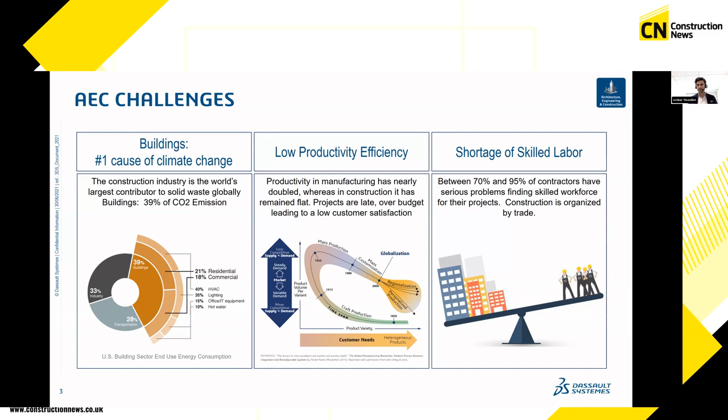To answer those challenges, we have built a dedicated portfolio of solutions from design to renovation with an integrated built environment: how to settle the global collaboration regarding all the stakeholders, ensuring the single source of truth at each moment of your project. And as well, we are working on something that is disruptive for us that Kurt will explain, and this is productization. Let me give you two elements to start.

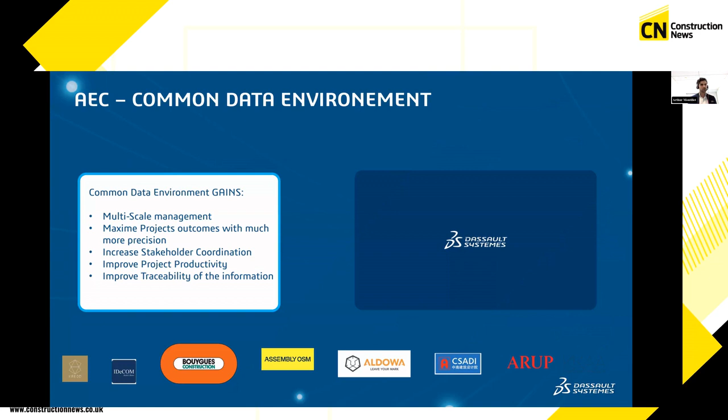The common data environment. When we are speaking about a digital twin, it's not only a 3D model, it's as well all the processes that are going to be put in place in order to conceive the 3D model. So the common data environment gains that you will be able to see with Pedro is a multi-scale management. Maximize the project outcome with much more precision, increase stakeholder coordination, improve productivity, and improve traceability of the information. The idea here is to do this approach at two levels, the enterprise level and the project level.

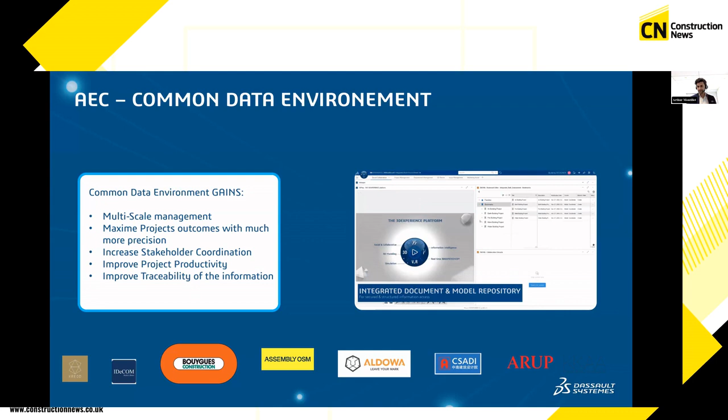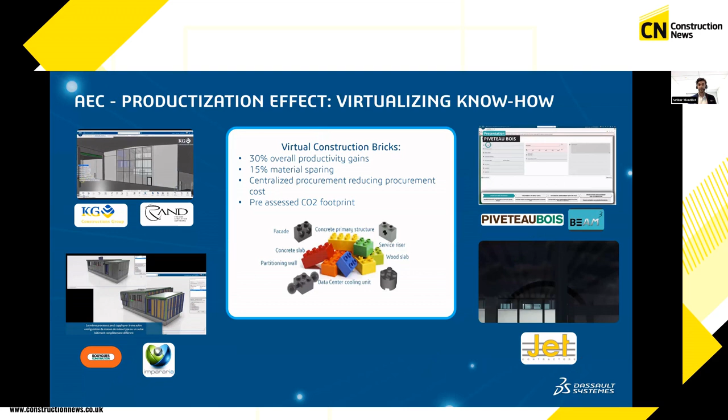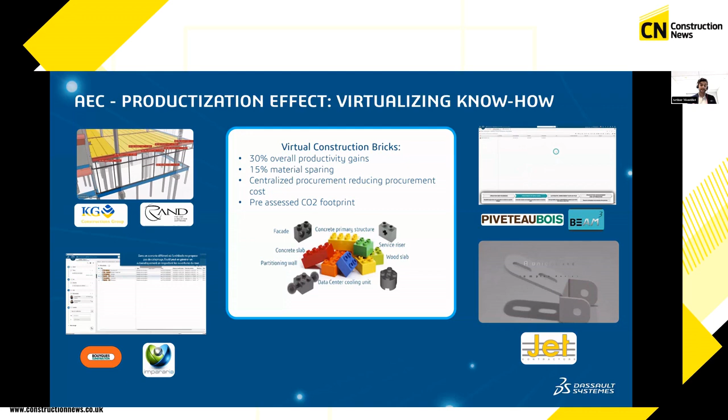Second, if we move to productization, what is productization? It's only the virtualization of the knowledge and the know-how. Here you can see some videos of several of our customers from KG Construction, Piveteau Bois in France, Jet Contractors. All those players have applied those principles that you are going to see in the Kurt session. The overall gain: 30% on the overall productivity, thanks to the virtualization of the know-how and the ability to reuse what has been done on one project in another.

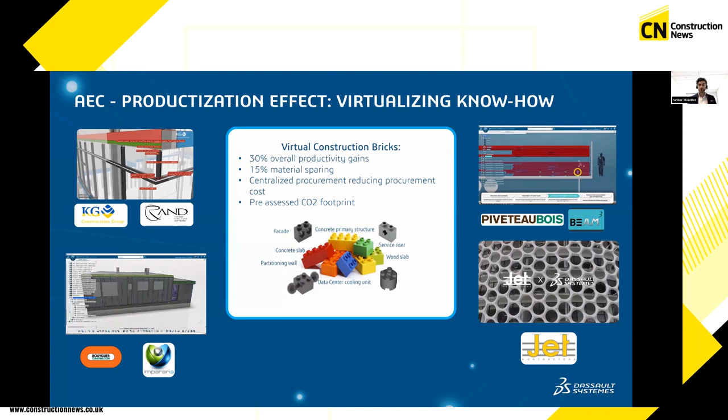15% on material sparing. Centralized procurement, reducing the procurement cost. Let's imagine that from your bill of materials, you are able to order the different screws for your buildings. You can make some good improvement regarding your purchasing process here. And of course, pre-assess the CO2 footprint. It was a quick introduction for my part.

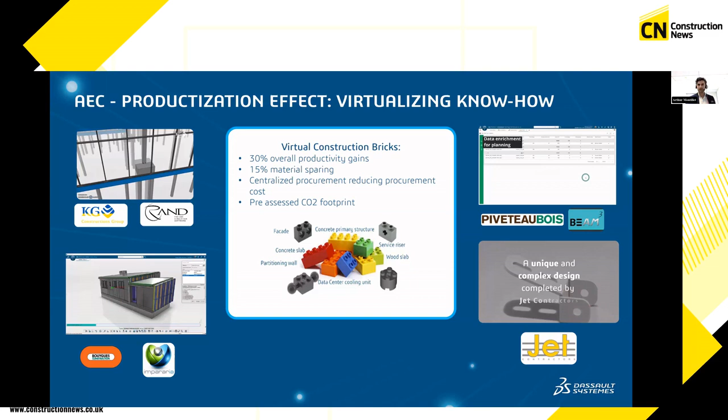My name is Pedro Diaz-Cocero, and I am Industry Solution Experience Manager with Dassault Systèmes in the Architecture, Engineering, and Construction industry team. Today I'm going to walk you through the main aspects of our common data environment, integrated data environment. According to ISO 19650, which is the most extended standard for collaboration in the AEC ecosystem, there are three main pillars that a common data environment needs to fulfill.

Without going into details, the first one is being able to manage stakeholders and the information they can access, meaning that for any piece of information, being able to determine who can see it and define these collaboration groups within the project team. The second pillar is lifecycle revision management and workflows. Basically, what the standard says is that we should be able to track the maturity of information as it evolves throughout the project, and be able to define approval workflows that allow us to validate the information before it transitions between these maturity states.

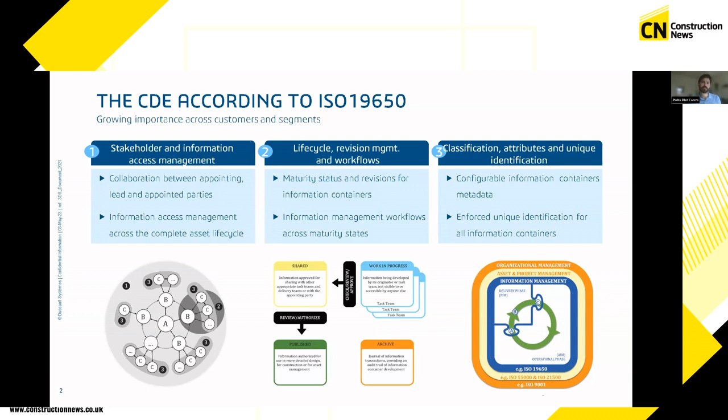The third pillar, classification, attributes, and identification, just refers to the metadata of information stored in the system. It's all about being able to capture this metadata, this additional information on all the objects, and being able to configure it, enrich it, and adapt it to the project needs. So let's have a quick look at how we fulfill these three pillars with our 3DEXPERIENCE platform.

The first pillar, stakeholder and information access management, we address with a powerful P&O, people and organization, framework, where we can create companies, business units, and departments that will group users. This allows us to segregate the information that each of these stakeholders can access. For instance, a general contractor in our platform will be able to see all the information stored in there. But if we have subcontractors that don't necessarily need to see the information provided by other subcontractors, we can make sure they are only able to see the information relevant to their company.

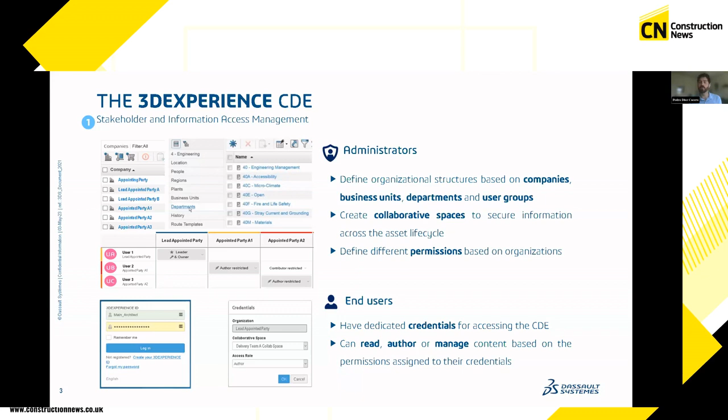All this is taken care of by the administrators, so for the end users, there's no hassle. They can just access with their individual credentials, and all the information will be filtered according to their permissions. The second pillar of the common data environment, lifecycle revision management and workflows, is part of the DNA of our system. We have a powerful lifecycle management system embedded in our solution, where every piece of information stored in our system, be it documents, drawings, BIM models, you name it, has an associated maturity.

So this piece of information will transition across these maturity states, and depending on the maturity state, it will determine who can access that information and whether it will be modifiable or not. In addition to this, we can always track the history of everything that has happened to any given object. So we can always see previous versions of the document, when those versions were created, by whom, and what were the later versions and what's the latest version.

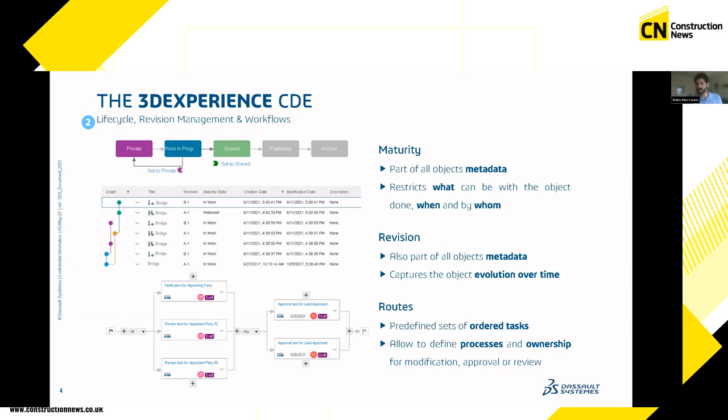And finally, with regards to the workflows, we fully support them in our system. The way it works is we can define these sets of ordered tasks and assign them to specific users or organizations, and we can at all times track in which state the workflow is, and what's the next task, and what was the feedback provided by previous users.

The third pillar of the common data environment is these metadata classification attributes, and we manage this in different ways. The first way is by being able to enrich all the metadata of a specific object type. Say that you want to add an attribute to a document or to a drawing or to a site or a BIM. We can do that.

But we can also leverage classification. And the way this works is by defining these hierarchical structures where by adding a specific information to a container, it will automatically inherit attributes that are relevant for that part. And that way you can enrich documents, drawings, or BIM models, anything in a very smooth way.

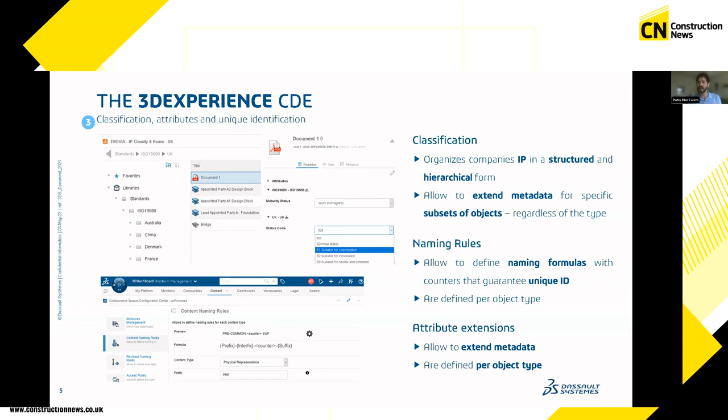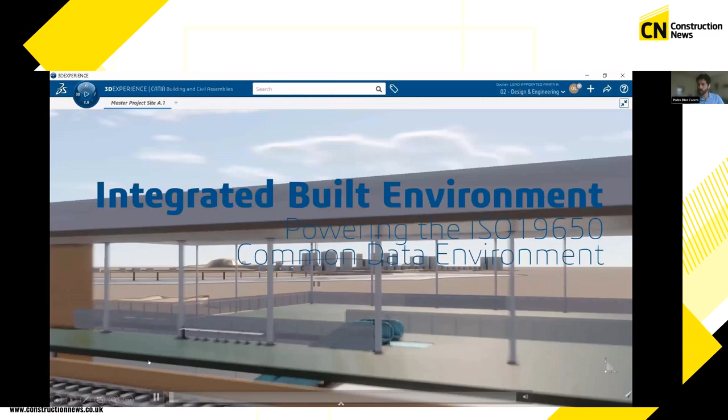Now let's have a look at this video that explains everything that I just covered quickly and illustrates a bit better how we address that with 3D Experience. So as I was introducing for the first pillar, the stakeholder and information access management, we manage that with specific credentials. So if a general contractor accesses the platform, they will be able to see all the project information. But if a subcontractor accesses the same environment, the same dashboard, the information will be filtered automatically just to show the information that is relevant to them.

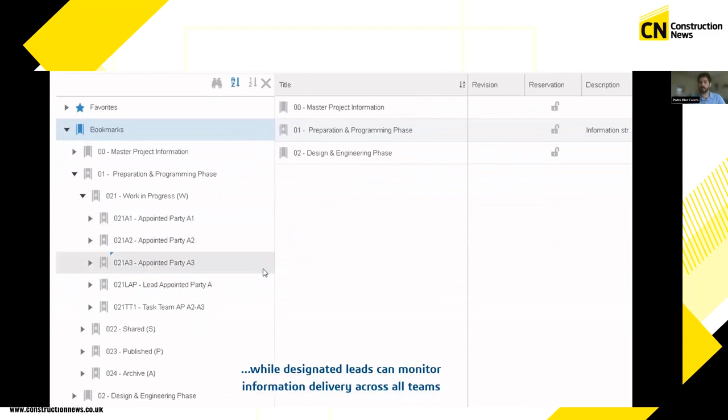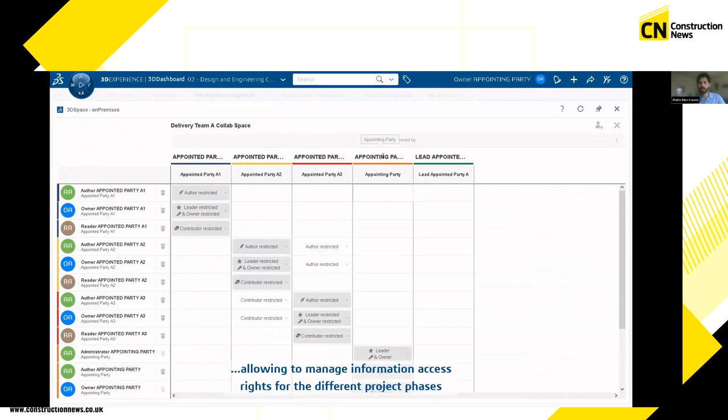Of course, same goes for all other types of information. So if we're looking at documents, if you're looking at bookmark structures, the information is automatically filtered to display only the information that is relevant to them. How we achieve that is through this structure of companies, business units, and departments that allow us to organize the people that are accessing the environment and with what permissions. In this way, we can define for any user accessing the environment what kind of permissions they will have and with whom they will be able to collaborate.

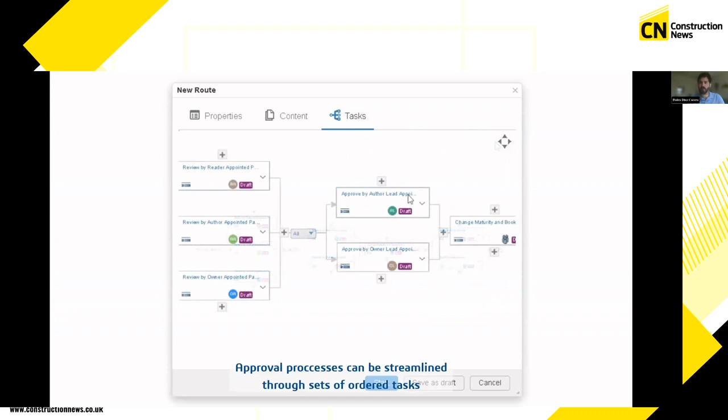On the second pillar, lifecycle revision management and workflows, this is the concept of routes that I was introducing, how we can have these sets of ordered tasks where different users will be able to provide feedback on any specific piece of information. And we will be able to track the feedback provided by all the different users and revisit what has been given as feedback in previous steps and take that into consideration for the evaluation of any information.

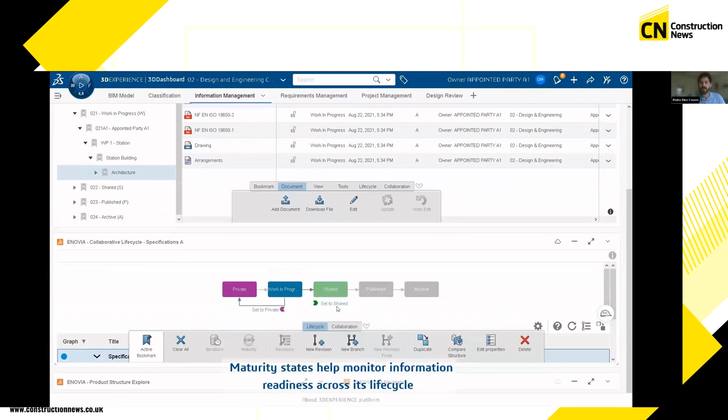The last bit, the maturity states, as I was mentioning, any information in the system will be able to transition across these maturity states. And depending on the permissions of the user, they will be allowed or not to modify the information. We can always track the versions of all the information and be able to revert to those previous stages and see who performed these changes and at what stage.

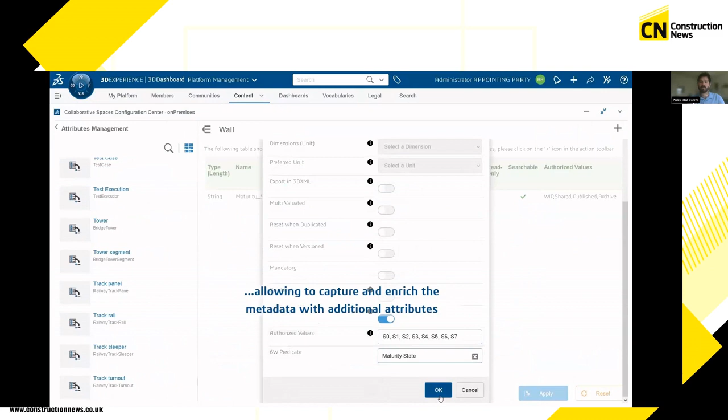Finally, regarding the metadata, we have a powerful data model behind our system that can be enriched by adding all these additional attributes to enrich the metadata of objects with predefined values of all different types. In addition to this, we for sure fulfill the naming rules that are required for your project so that we can adapt them to meet project needs. All these will be taken into account when generating new information and will be available for all the users automatically accessing the system.

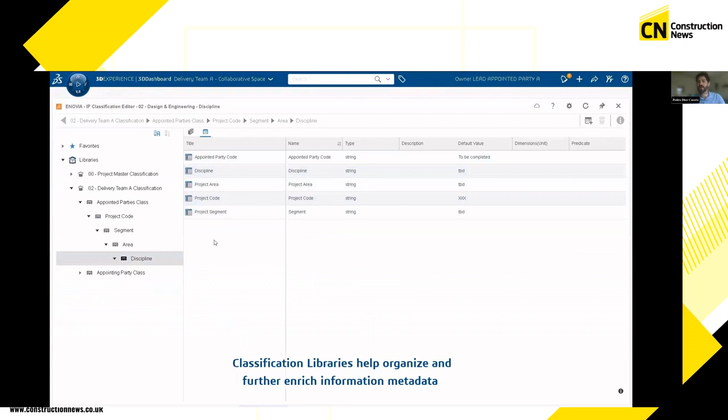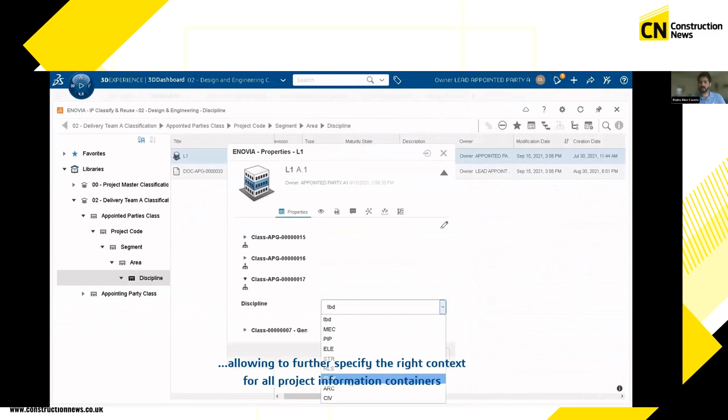Finally, on the classification, as I was introducing before, we have these hierarchical structures where by adding objects to these containers, they will automatically inherit attributes, being able to define what are the predefined values they should have and providing specific lists so that we can control the metadata of all these objects.

Very quickly, just to emphasize two key aspects of our common data environment and why we are different with 3D Experience. While other systems can perform most of the things that I was mentioning before, they still don't guarantee that there's no duplicates of information, and they still rely on these manual exchanges with no context and unstructured data. So what they have is documents that are stored in files. What we provide is an information management system where documents are objects like projects, the virtual twin of your asset, tasks, issues, everything is a dedicated object.

And what we provide is the possibility for the same document to be connected to the project where it will become a deliverable, to the virtual twin where it enriches the additional information on top of the BIM attributes and the 3D model of your twin, and it can be connected to a bookmark structure to package it in a form of a work package that can be assigned to a specific subcontractor. So documents we can manage, but in context of all this richer information, providing much better traceability and the possibility to guarantee a single source of information for all stakeholders.

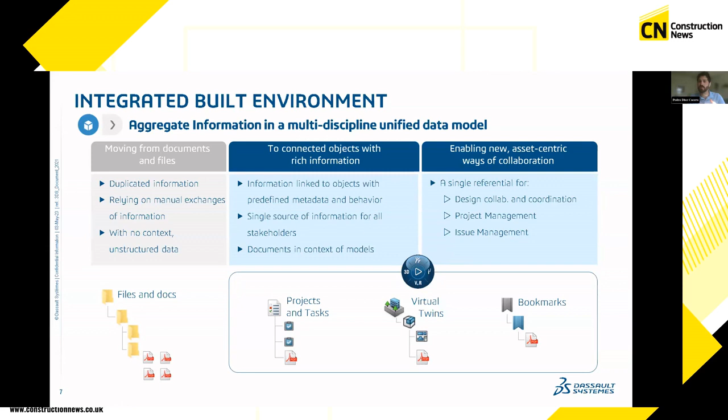The second key aspect of our common data environment, integrated built environment, is the way we manage collaboration in projects. So in traditional ecosystems, we have this scattered, disconnected ecosystem where each stakeholder is using their own common data environment or their own information management system, and they will manage exchanges through files and basically distributing the risk. And what we have here is mostly paper-based exchanges, 2D file-based with no information flow.

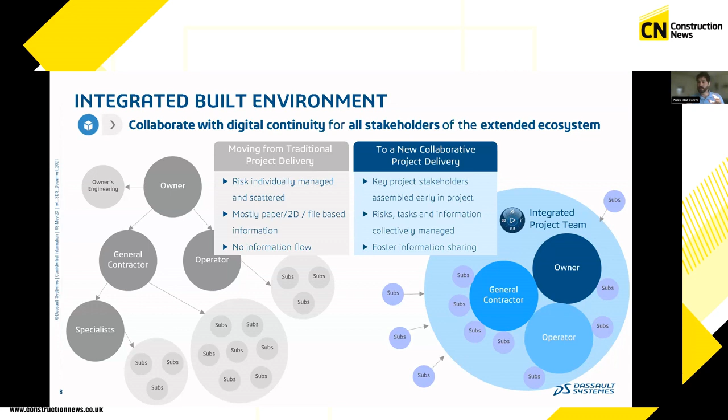What we provide is a single ecosystem, a single common data environment for all stakeholders where they can connect, always review the latest version of the truth with risks and tasks and information collectively managed and assigned to specific users, guaranteeing traceability. In addition to what I presented, there are more capabilities that we can bring. For sure, multi-scale common data environments is one of the aspects where we can connect BIM plus GIS information.

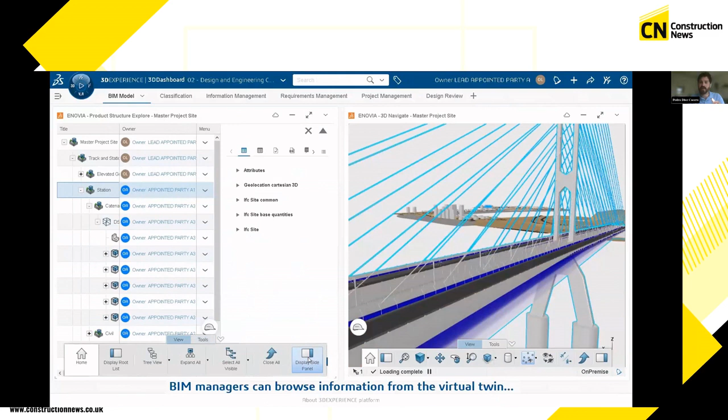There's a lot more. What we provide is a unified virtual twin where all information, regardless of metadata, related documents, issues, is connected to the virtual twin of the asset. So all information can be revealed for all the stakeholders that have access to it. And what we have is an intelligent model that can be filtered and queried based on all these metadata, all these attributes, to find the information that is relevant for all users.

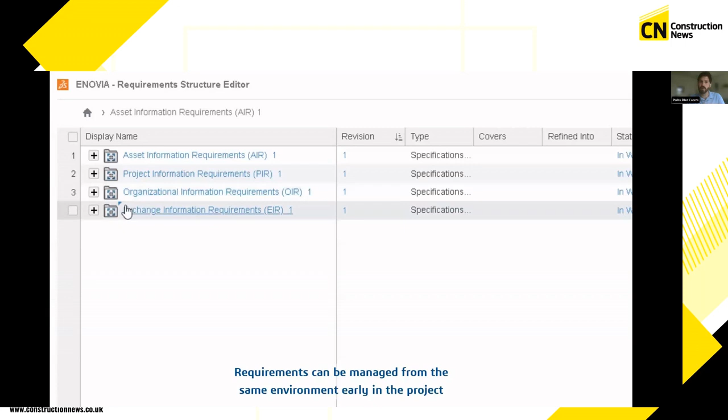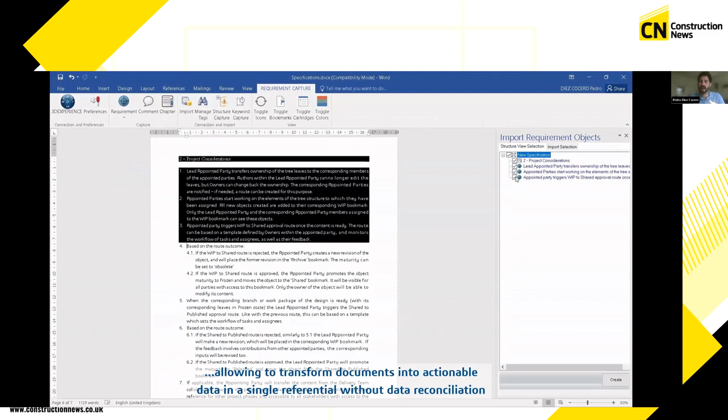In addition to this, we provide the capability to manage requirements that are related to the project so that at any given time, we can track the information that is required at any given stage of the project. We can convert it into actionable objects that can be assigned to users to guarantee delivery throughout the project. In addition to the requirements management solutions, we provide a full BIM review process where models can be brought into the platform in various ways through standards or through proprietary formats, and we can validate the information provided against predefined rules, so we can check if the models fulfill the requirements of the project.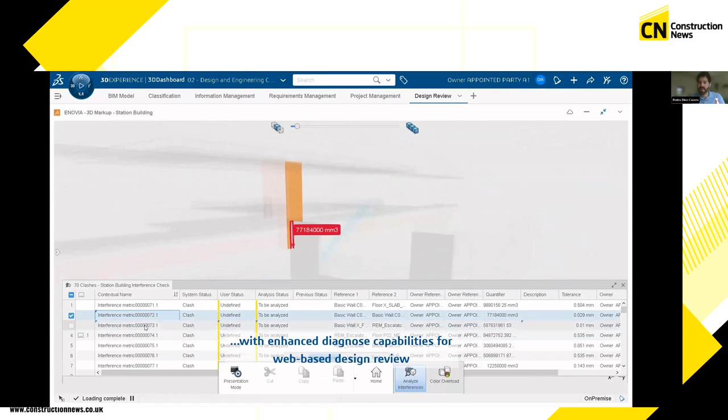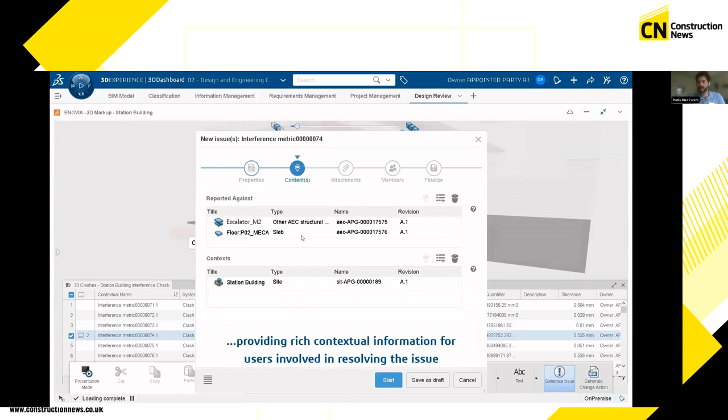We can run clash analyses to determine whether there are any issues among the models that are provided by the different subcontractors. We can analyze them in depth, and we can automatically trigger validation workflows and issue resolution workflows, leveraging the virtual twin of the asset to provide contextual information. These validation workflows for the issues track all the information that is relevant for the resolution, provide rich context in terms of the parts of the asset that are impacted by the issue, and can be assigned to specific stakeholders for managing the resolution.

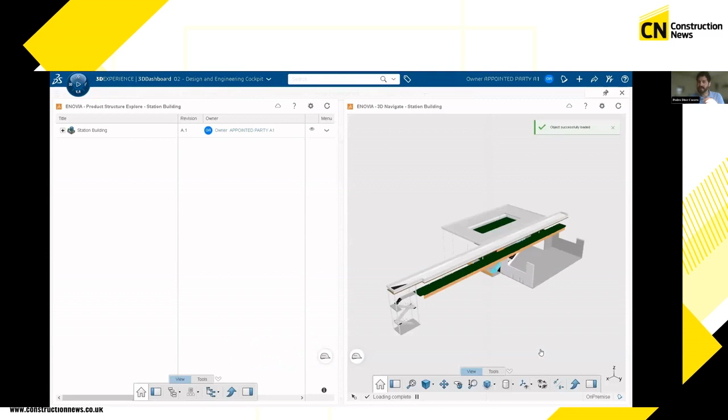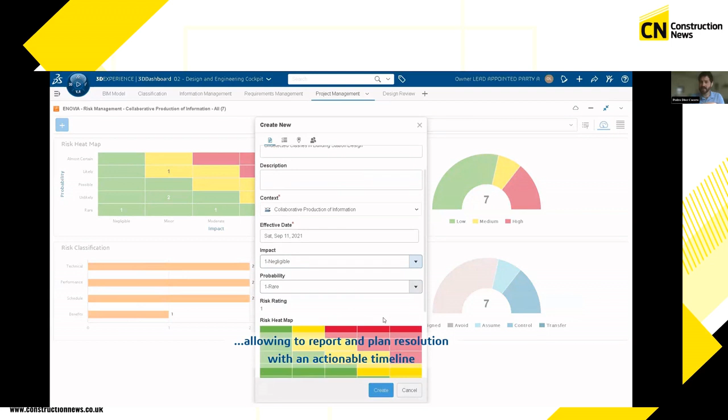All the information, again, becomes available through the virtual twin of the asset, which is the centralized place of managing all this information. In addition to the issue management capabilities, we have a full-fledged project management solution embedded in our system, where tasks and risks are connected to the virtual twin. In this way, we can manage holistically all the risks that are related to the project, and we can define who is responsible for mitigating the risks, what will be the mitigation strategy. We can assign specific gates for the resolution, guaranteeing a smooth resolution and tracking of the risks of the project. All these, again, connected to the virtual twin, providing a rich context for all the information that is available in the system.

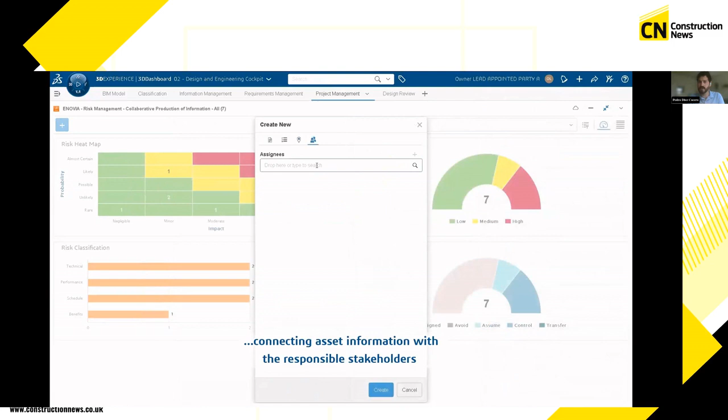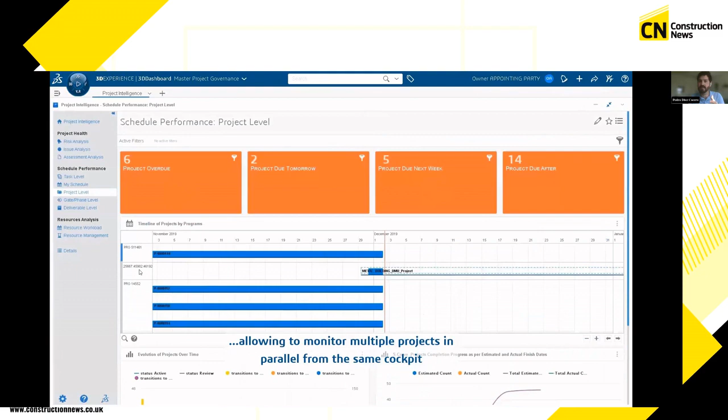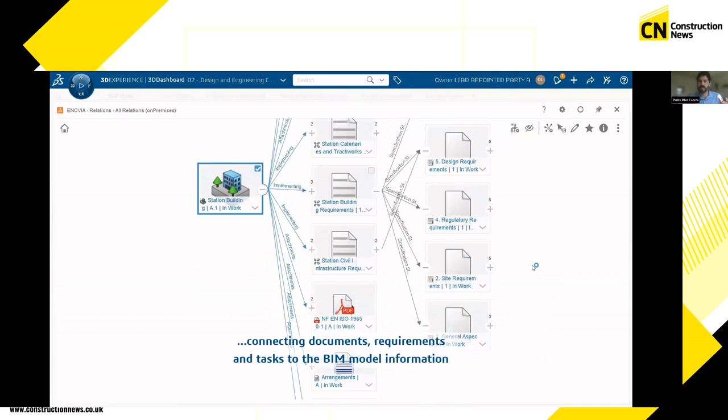Finally, we have analytics tools that allow us to have a holistic view of multiple projects that are being run in our system, being able to define all the tasks that are late, all the documents that are due, where the bottlenecks are. And in the end, what we provide is this full traceability, leveraging the virtual twin as the placeholder of all the risks, tasks, requirements, documents, drawings, everything, providing this holistic, unified, common data environment for all the stakeholders.

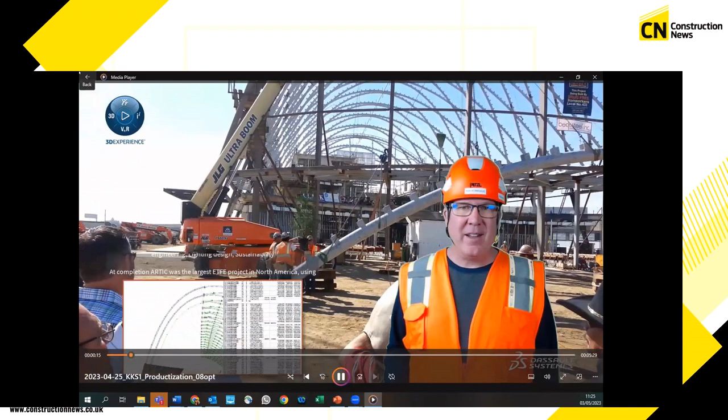Hello, my name is Kurt Komros. I am the Industry Solution Experience Senior Manager for the Architecture, Engineering, and Construction industry here at Dassault Systemes. I have over 20 years experience in the AEC industry, from architectural design to digital process development to automated structural and facade engineering to construction administration. You know, stuff like this.

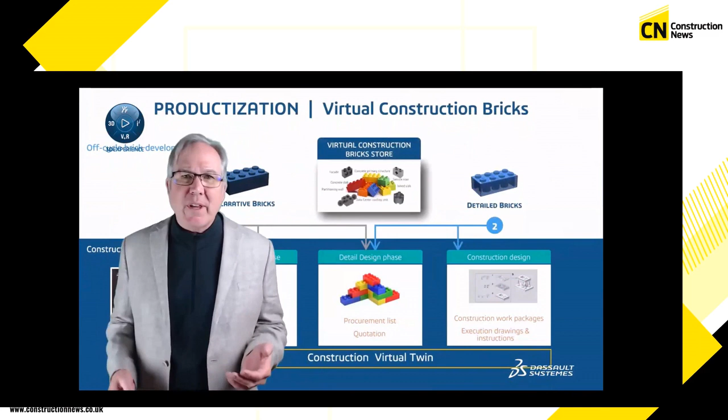Anyway, I'm here to talk about productization. So what is this productization that I speak of? And how can you get some? So, productization is a different approach that unlocks new levels of value and scalability for contractors and developers. At the core of this strategy are virtual construction bricks, digital templates which encapsulate construction know-how in multi-trade assemblies with standardized interfaces and generative variants.

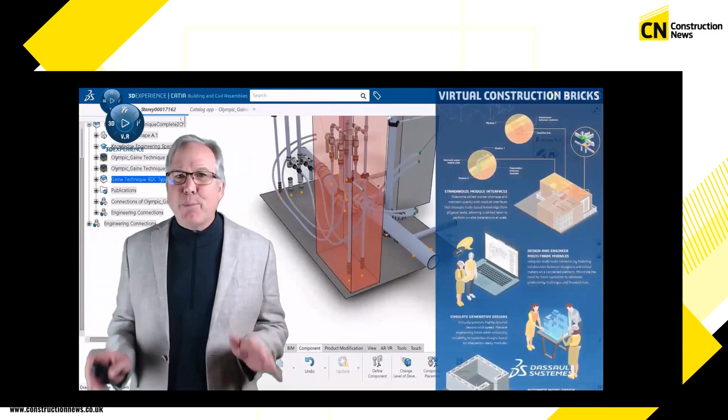These bricks are modules that we organize into product lines, which can achieve a wide range of objectives of stakeholders, such as owners and general contractors. The primary concept, however, is that these bricks are managed independently of projects, an upstream investment in downstream construction serenity. Basically, what this means is treating building design like consumer product design.

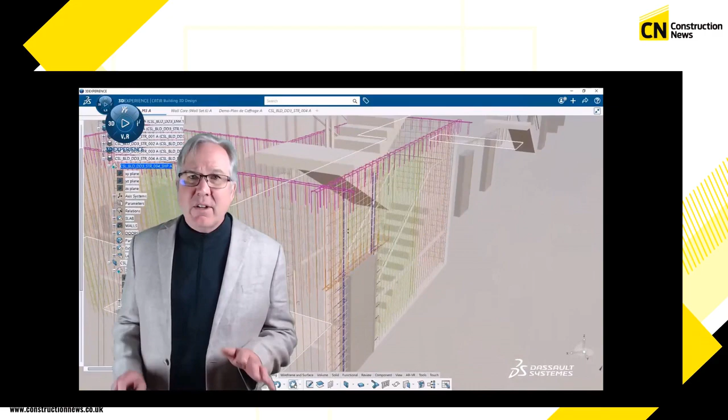We do this upstream from the turmoil of a normal architectural design cycle, meaning we design, engineer, simulate, document, and validate multi-trade elements or systems that can be templated to be efficiently incorporated into a variety of building contexts in a contractor's pipeline. One of the key benefits of productization is sustainability. True innovation in carbon reduction requires thoughtful study and engineering outside of the project delivery cycle.

Now, very important to the concept of productization is modularity. And this can, but does not have to be volumetric modular, but modularity as in modular product design, meaning custom components with standard interfaces that can be incorporated into the bigger assembly, interchangeably and produced by an organized supply chain.

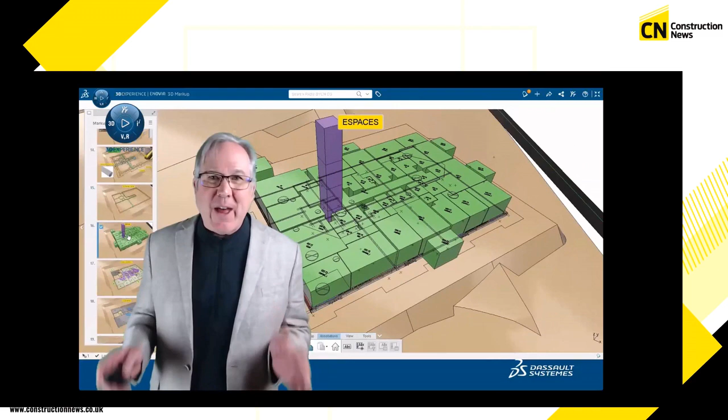Next, these virtual construction bricks are produced by you, the experts in construction. You become virtual makers, adding your value in the development of true virtual construction twins, which are hosted by the prime integrator. So, imagine being able to detail a building enclosure design for 200,000 square feet of curtain wall in just 10 clicks, or have the ability to move 10,000 structural embeds in minutes, because the slab edge detail changed again. There are no limits to the amount of construction know-how that we can bundle.

Now, it does take time, a cultural shift, and requires diligent refinement to develop these bricks such that they can be used across many projects. And ultimately, the global construction ecosystem will have a proper digital marketplace where virtual makers can efficiently connect with prime integrators and other stakeholders for an accelerated construction twin.

Okay, so how do we help with all of this? Our solution for productization is a business, design, engineering, and lifecycle management enabler called From Experience to Construction. From Experience to Construction is broken down into 5 parts, what we call industry process experiences. Number 1, building system architecture. This is model-based system engineering for product definition.

Number 2, virtual construction experience portfolio management for product data management, product development, and governance. Number 3, virtual construction experience modeling for brick authoring in CATIA or SolidWorks, or consolidate data from other sources. Number 4, virtual construction experience process engineering for process simulation and work instructions. Number 5, virtual construction project composition for integration of bricks in the virtual construction twin.

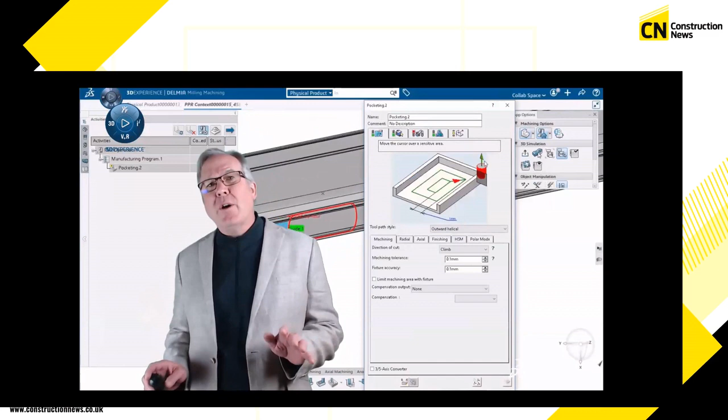So, to wrap this up, productization is powered by our vast capabilities to automate the complexities of construction design, and it is our unique ability to capture this much design intent that puts us in a whole different universe from our competitors. Our tools are no longer just for the geometrically complex projects, because all construction projects are complex, and our tools and our methods have been proven around the world to provide value far beyond the investment.

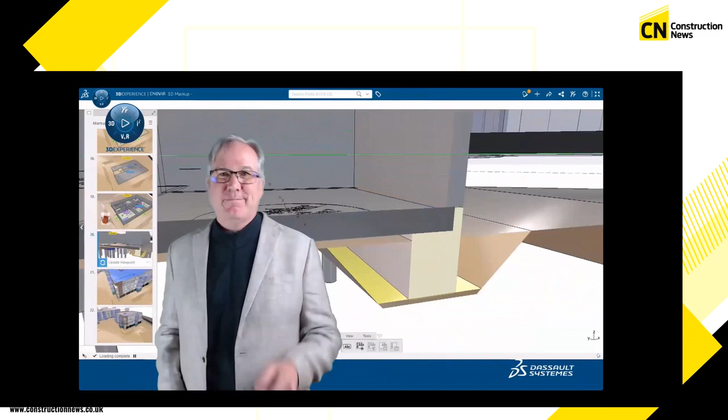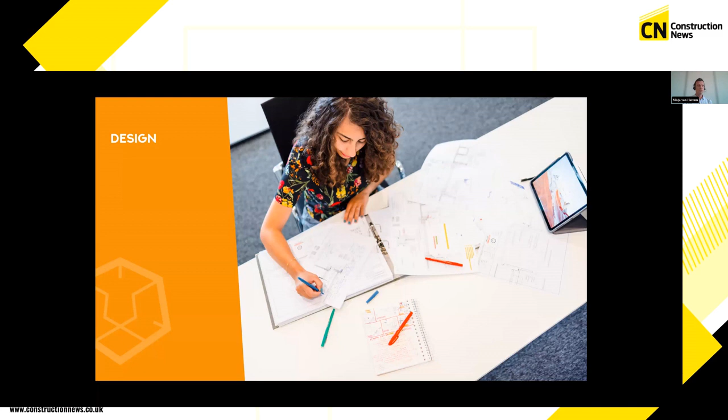So, Aldowa, who are we? We're a full service facade builder for metal and composite cladding, meaning we take on entire projects from design to engineering, manufacturing, and finally installation as well. So first design, we take the idea of the architect and try to transform that into something that can actually be built, ideally in close collaboration with all other stakeholders.

Then we take that idea and we model that, and we turn it into something that is engineered well and ready to be manufactured. We do all the manufacturing in our own factory, and after this we install everything on site, trying to tackle all challenges that we might face there.

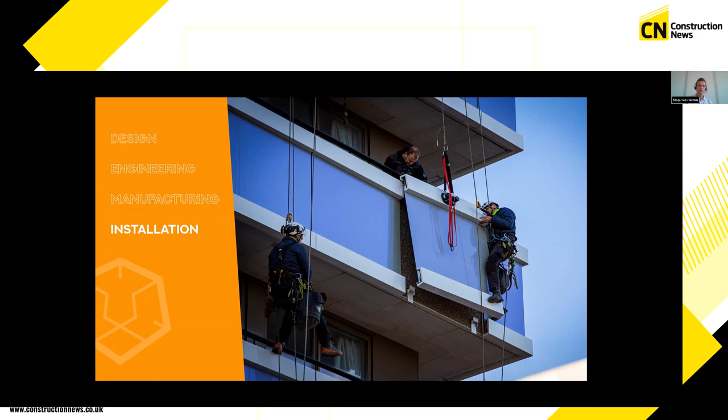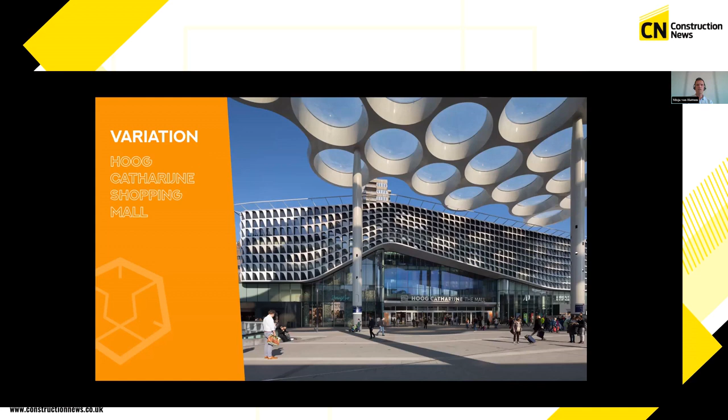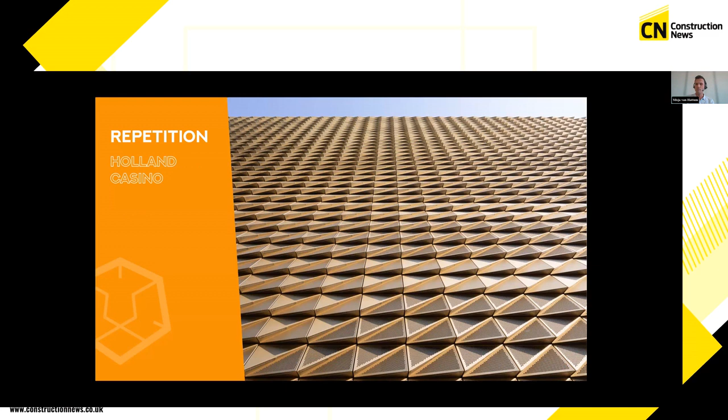So our projects. We have been using Dassault Systèmes software for a long time, and with great satisfaction. But over time, we felt we had some challenges. For example, logistics, making sure that every piece of the puzzle arrives at the right place at the right time. We need to be able to create panels in different shapes and curves with lots of variation, using parametric design to create facades with a high degree of repetition, whether it's internationally or in the Netherlands. We need software that can support us to create these kinds of projects.

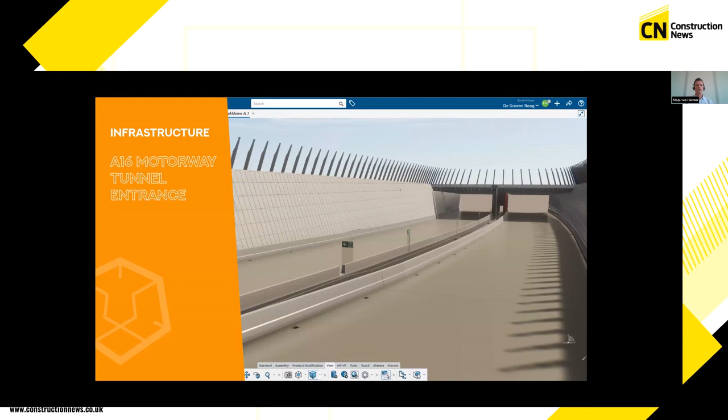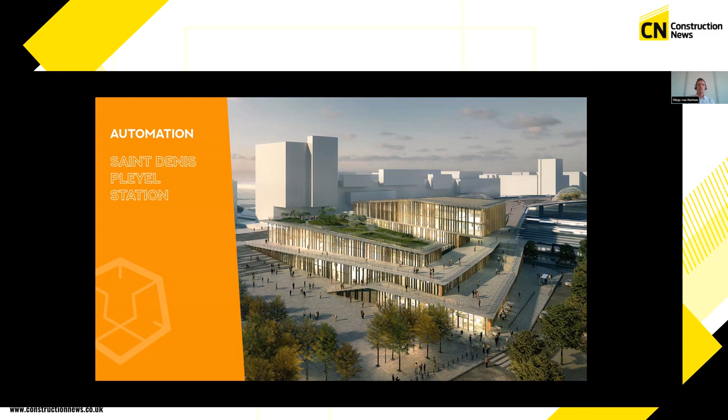And with a high degree of automation, we felt that we have been doing a lot of manual work in the past, things that we know can be done by the computer, and why should you do it yourself? So we used this in the past for our projects, and we will be continuing to use that in our future projects. So all of this posed us with certain challenges, and these challenges made us choose the 3DEXPERIENCE platform. Let me show you why.

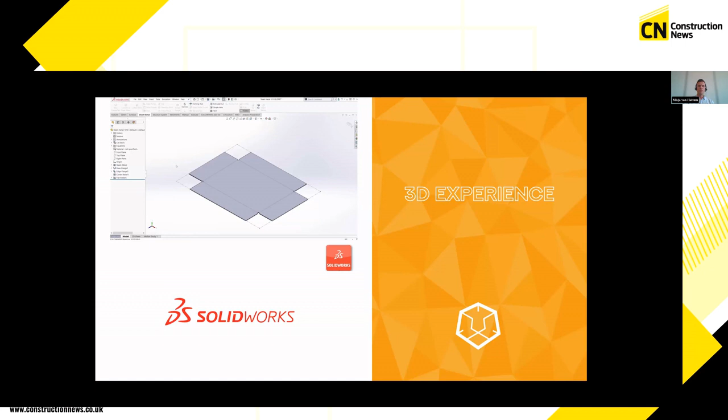So we have been using SolidWorks with great satisfaction over the years. It allowed us to engineer most of the projects that you just saw. With us being a sheet metal manufacturer, it allows us to model all our components, unfold them, add all the information to it, and share this with both our clients and also with manufacturing. We did feel, however, that we needed to add something on top of that, a degree of automation, some scripting, and later on other functionality as well.

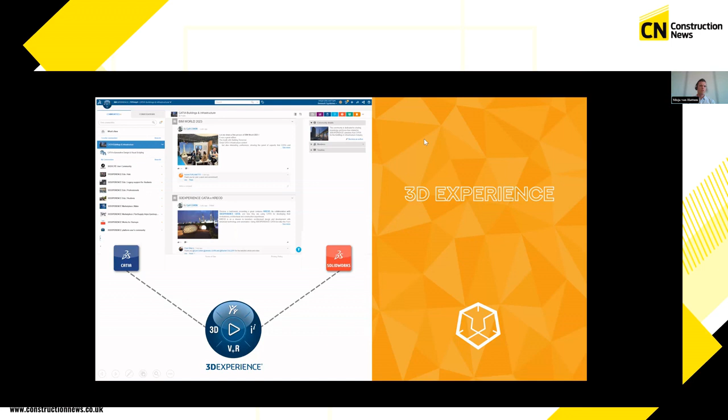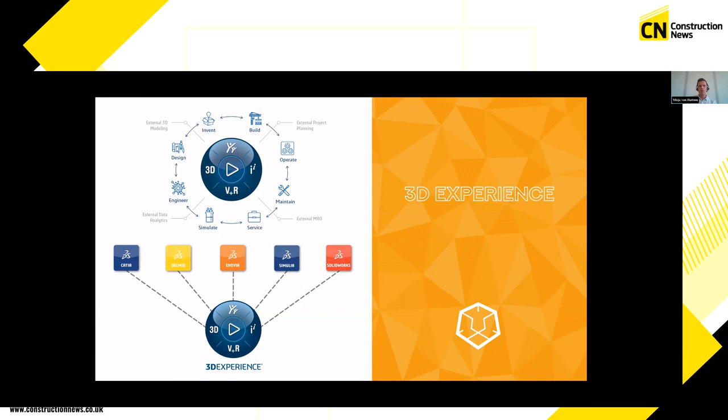So the great thing is that both SolidWorks and CATIA run on the same 3DEXPERIENCE platform, making the transition smoother for us. On top of that, all the capabilities that you saw in the previous presentations, to be able to simulate, to collaborate, and to optimize all your company processes and project processes.

So we have been using this software on several projects now, and I would like to show you how we have been using it on one of our projects, the Saint-Denis station in Paris. It's a design by Japanese architect Kengo Kuma, and it will be serving almost 250,000 passengers each day, connecting different parts of the city of Paris. And within that station, Aldowa will be designing, engineering, manufacturing, and installing stainless steel and enamel panels on 7 levels.

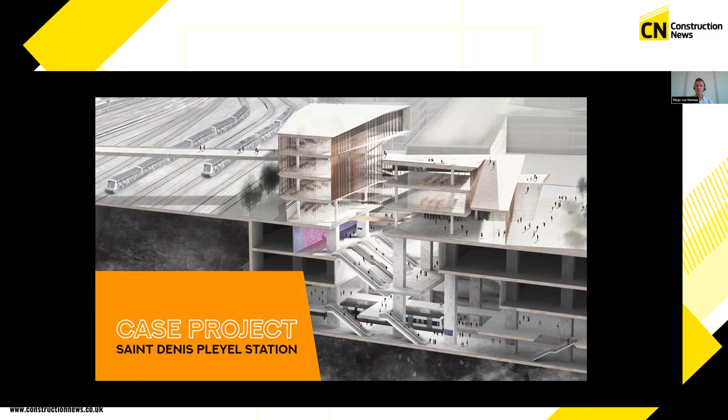So the challenges within this project include a fixed deadline. They will not move the 2024 Olympics, which this project will be serving. Over 2,000 square meters of panels, with 6,000 panels in total, of which almost a third will be unique, with different materials, many exceptions, and a structure that can vary in depth between 7 and 70 centimeters.

So all these challenges made us turn to Dassault Systèmes to see what kind of services they could provide to help our team automate the repetitive tasks. Our team has been doing facade projects for many years, but we needed a degree of automation to eliminate manual tasks as much as possible. So we got in contact with the Dassault Systèmes cloud outcome-based engagement team.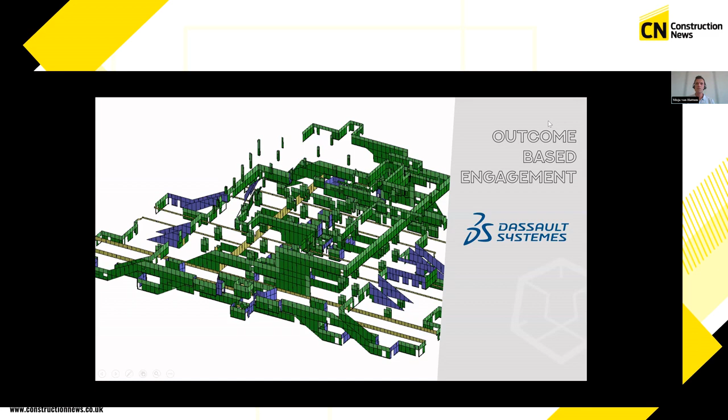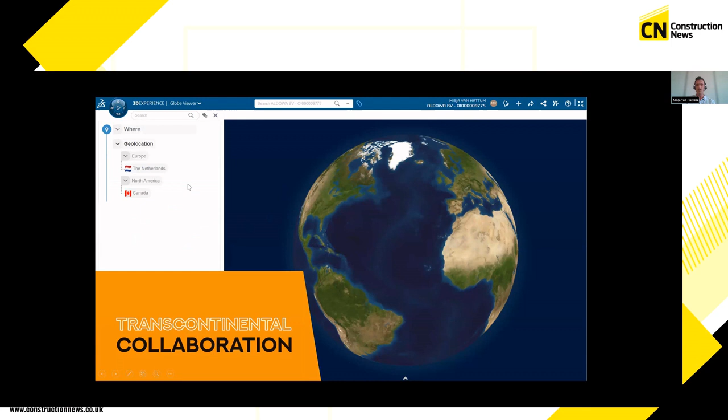Now, the team we got in contact with was based in Canada. The CATIA hub there helped us, with us being in the Netherlands. This far distance may have seemed a problem, but I will show you later on why this all worked out well for us. So the tool that was designed for us included a lot of automation, scripting in different languages. CATIA has its own language, EKL, and on top of that, other languages like VBA or Python can be used. And in this project, a lot of visual scripting in an app called xGenerative Design has been used as well.

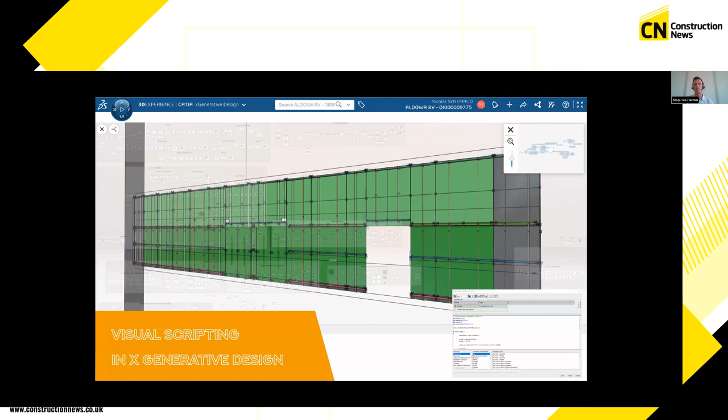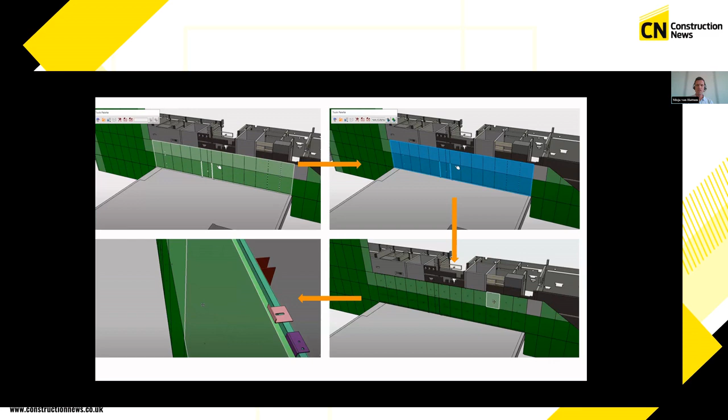Now, the tool that was designed for us has allowed us to select a wall, and automatically the tool will calculate the depth to the concrete structure behind it, followed by the creation and automatic placement of all the components that will be needed. So whether it's brackets, rails, anything will automatically be created, independent of the depth that there is behind there. So as you can see, there are different types of structure, and the tool will place all this automatically independent of the depth.

Now, at the same time, within this project, we have many shapes, and the tool recognizes and processes all these shapes. So it's not just standard projects. It's not at all a standard product.

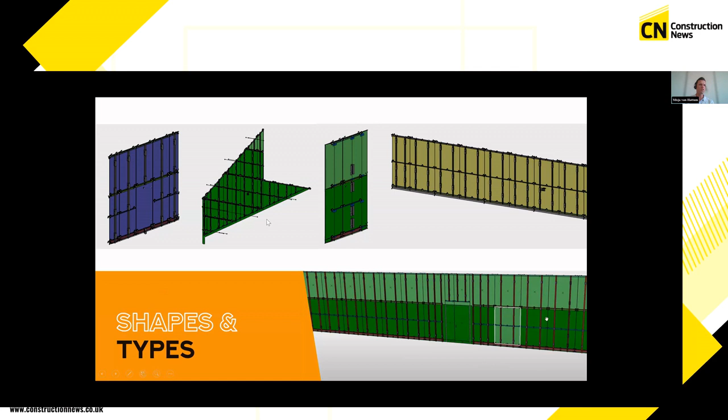And at the same time, the tool allows us to evolve over time with simple geometry at the start of the project, and over time adding more information to it. So first the structure itself, then adding a higher level of detail, with in the end all the individual components being stored in the PLM database, including all the IFC BIM attributes that are needed within this project.

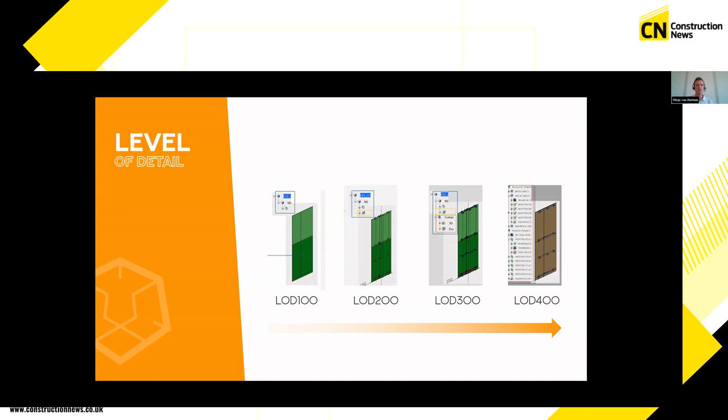This way, we created a virtual twin of the entire project, which includes all the panels, all the components, all the structure, and with that, all the shop drawings have been created automatically, for both production and installation.

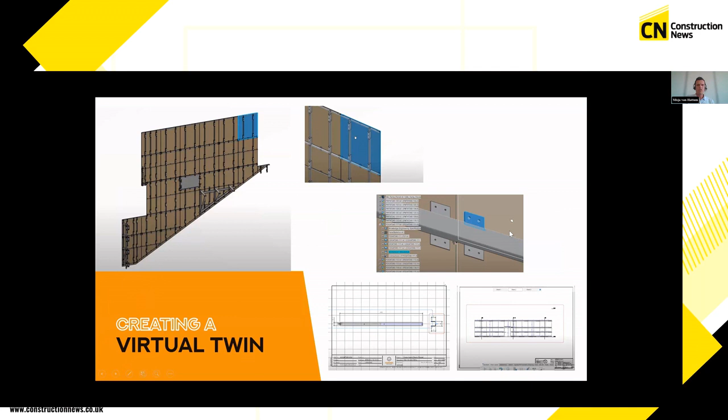Now, the way we worked on this project was fully in the cloud. So all the files were stored in the cloud, and this allowed us to all work on the same model at the same time, whether we were based in the Netherlands or in Canada.

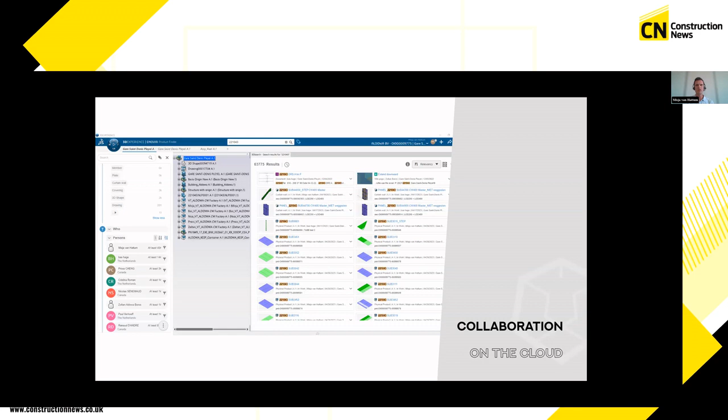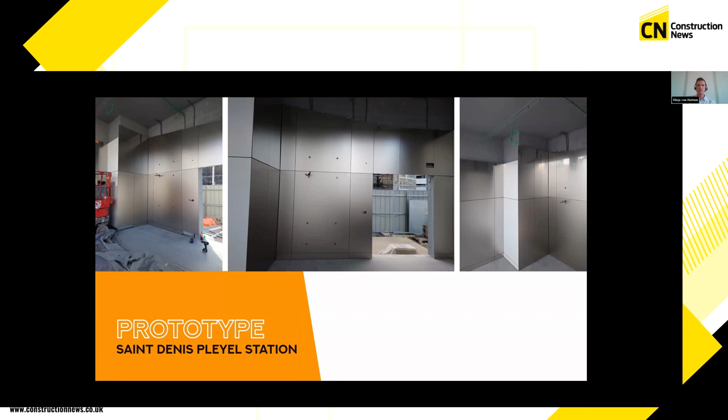At the same time, we were able to document all the processes within the community's wiki pages for all users to be reviewed and look back. So now all of this resulted in a situation where we have delivered a prototype, and we have currently started manufacturing the thousands and thousands of components that we will be needing on this project.

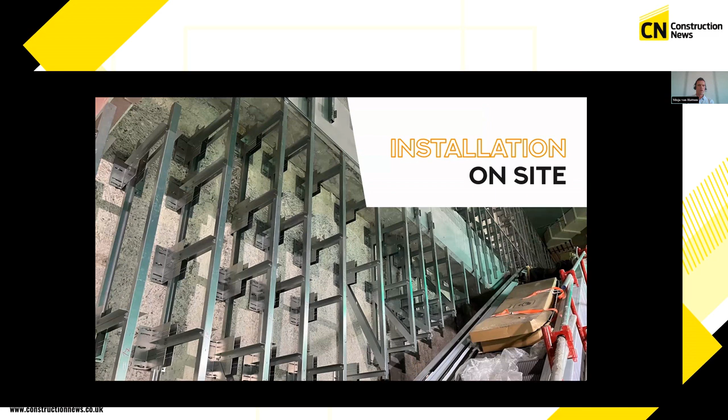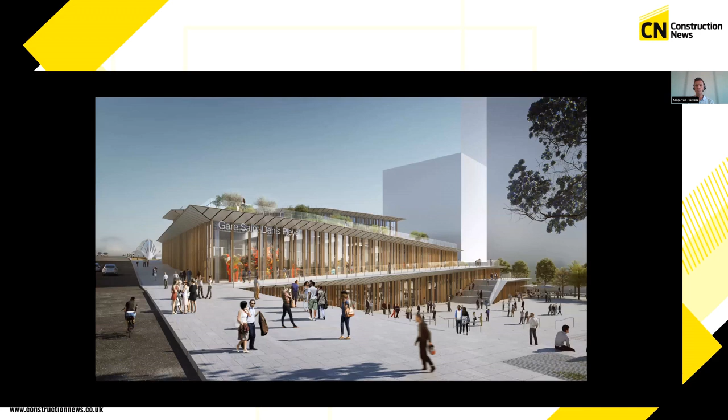On-site installation has started as well, and this will be continuing until 2024, when the station will be opened to serve all these passengers.